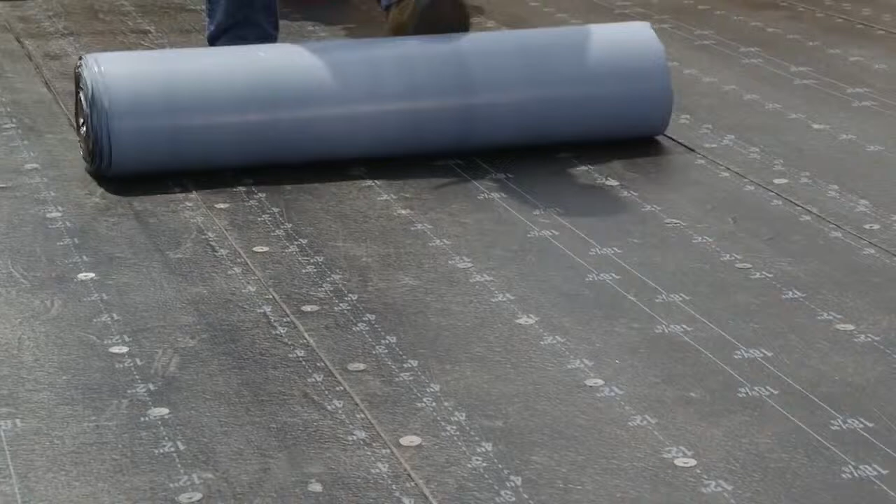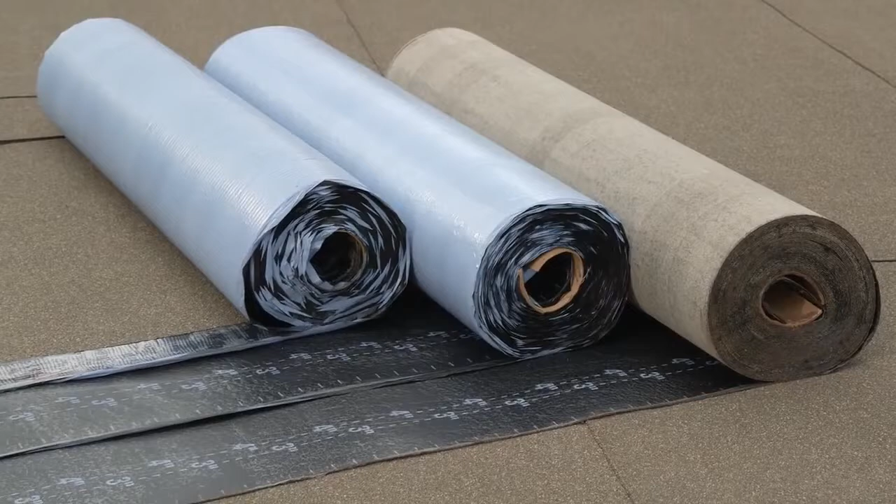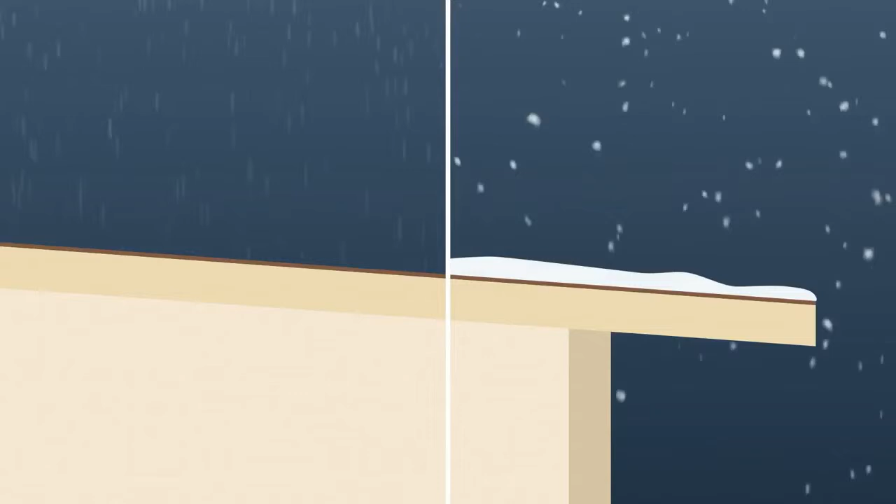The Owens Corning DeckSeal roofing system offers numerous advantages over competitive low-slope products, from its dual compound formula for durable performance to its granule-free side and end laps for seam sealing. It's no surprise that areas of the home below 2/12 pitch can require special attention. These low-slope roof areas, commonly found over garages, porches, additions, carports, and sunrooms, typically don't have the drainage of a steep slope. As a result, harsh weather conditions like snow, ice, and rain can result in leaks.

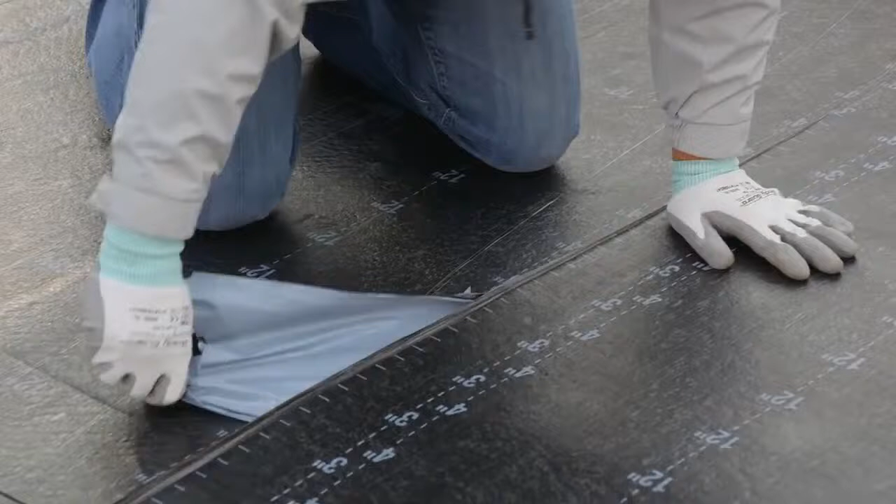The new DeckSeal roofing system can be applied as either a 2- or a 3-ply system to provide excellent protection and versatility to mix and match components. In this video, you'll learn common practices for low-slope residential applications, including why the Owens Corning DeckSeal roofing system is a preferred choice. The DeckSeal roofing system is a self-adhered mod bit technology, which is often preferred because it is an easy, clean application with no fumes, odors, or smoke.

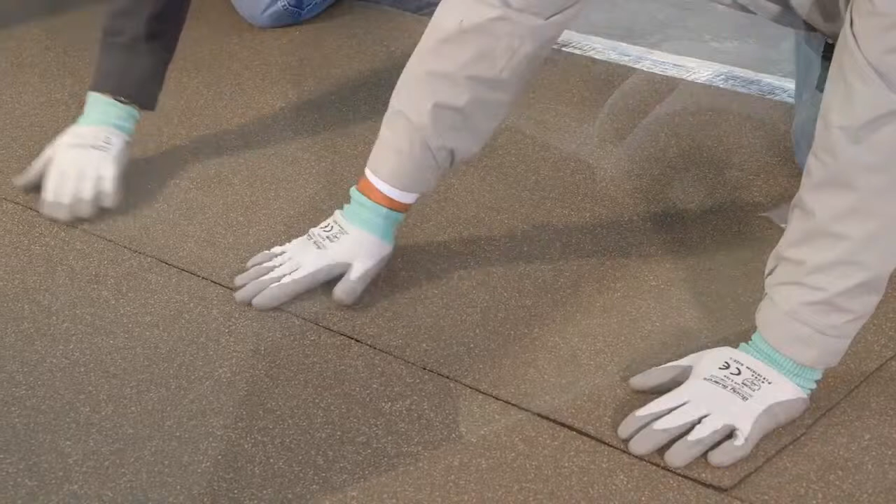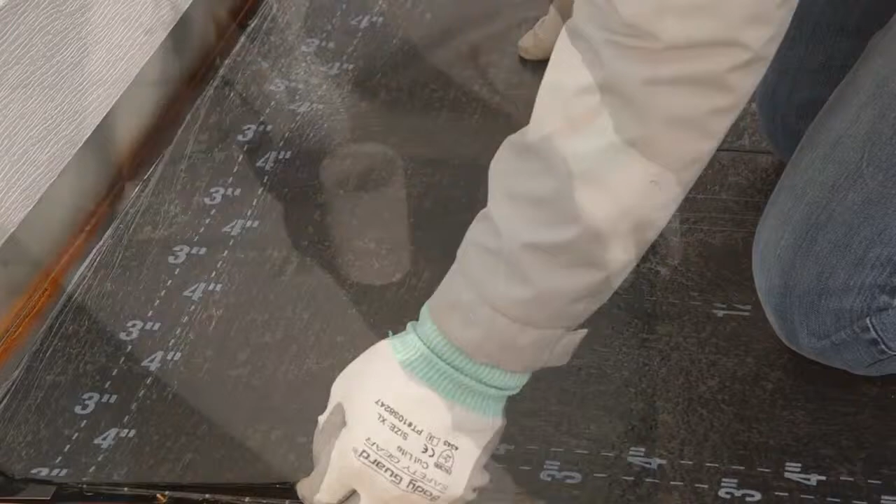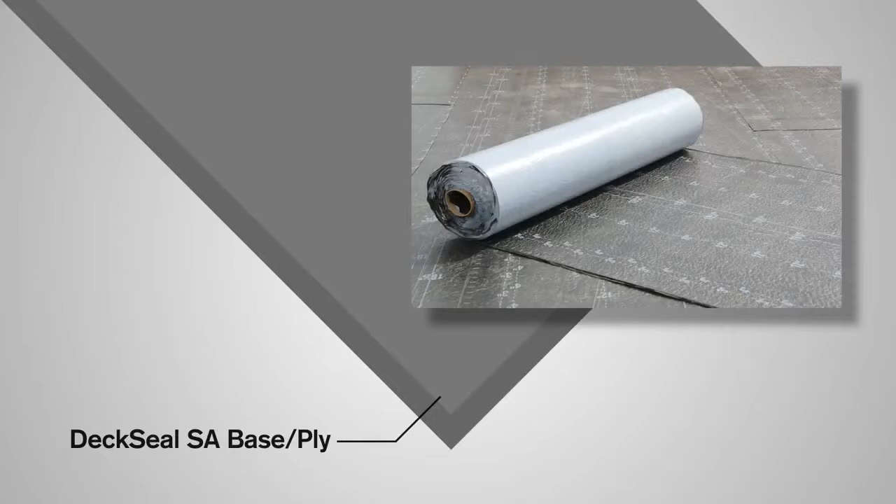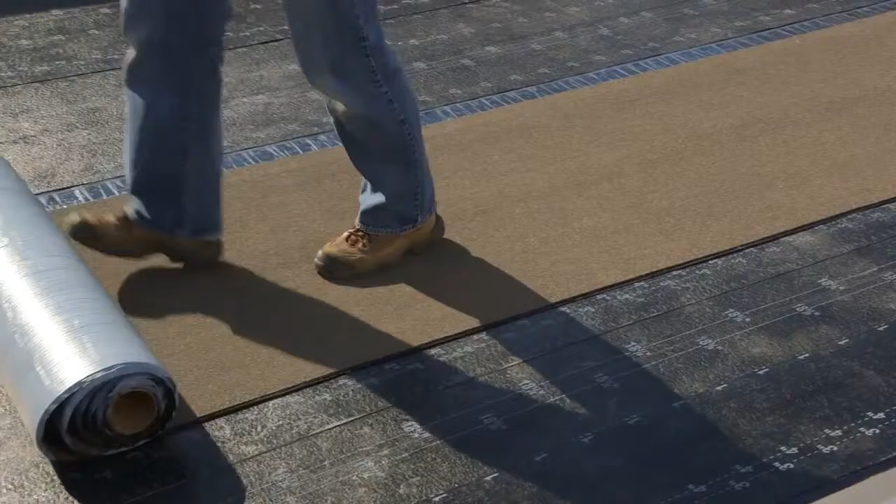The innovative DeckSeal roofing system consists of up to 3 layers that serve as waterproofing for the field of the roof, flashings, perimeter terminations, and typical rooftop penetrations. The first layer is the mechanically attached base sheet called the DeckSeal MA nail base. The second layer is the self-adhering base sheet called DeckSeal SA Base/Ply. And lastly, the cap sheet membrane on the top surface is known as the DeckSeal SA SBS cap. These 3 membranes can be used in different combinations to achieve a premium membrane assembly.

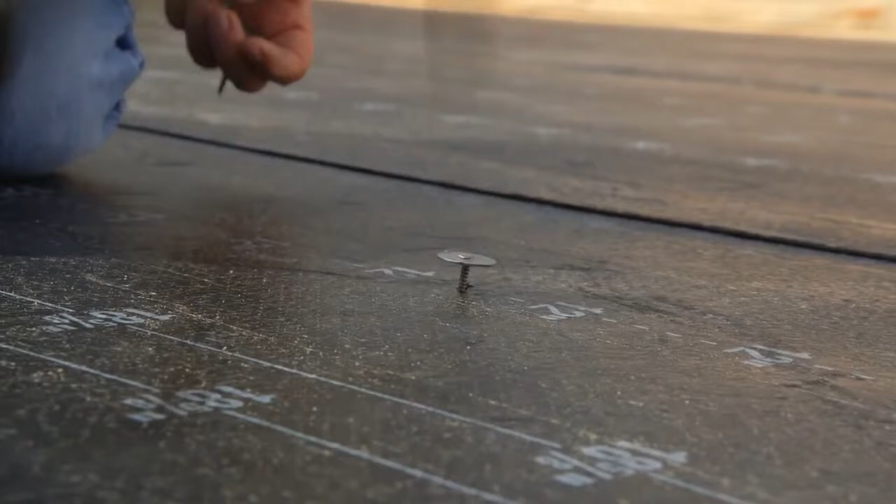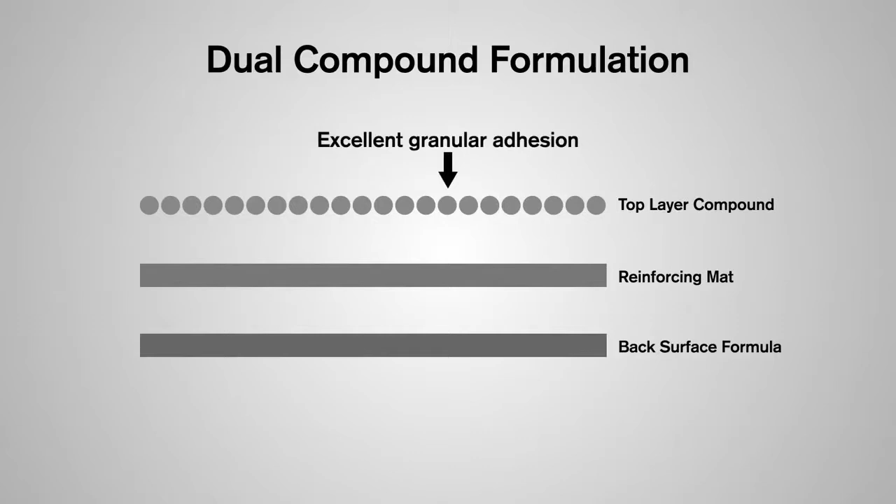Typically, a mechanically attached base sheet is used if a deck is unsuitable for a self-adhered base, or if the customer wants to easily strip the deck if a future replacement is necessary. The Owens Corning DeckSeal roofing system has several unique features. Its dual compound formulation provides excellent granule adhesion, while the back surface formula provides aggressive adhesion. Together, the 2 compounds offer enhanced adhesion, added durability, handling, and long-term performance that our customers expect.

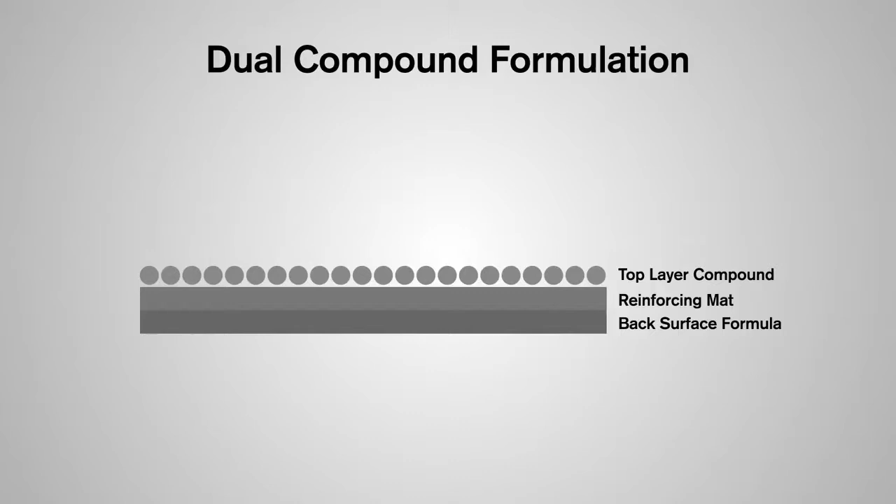Another feature of the DeckSeal roofing system is the granule-free adhesive selvedge on the side and end laps for quality seam sealing. Available in 6 popular colors, DeckSeal roofing system also streamlines your ability to color match and coordinate to the most popular shingle colors with today's homeowners. The DeckSeal roofing system is supported by the most recognized brand that homeowners know and trust. Taking a system sell approach with Owens Corning roofing products can help make closing the sale fast and easy.

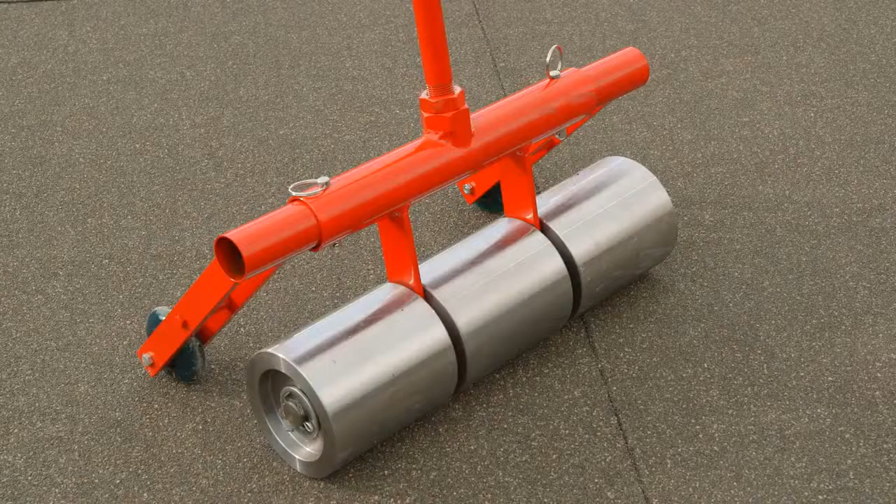With proper preparation and installation best practices in place, installing the DeckSeal roofing system is fast and dependable. Recommended tools for installation of the DeckSeal roofing system include a 3 to 4 inch wide hand roller, heavy-weighted linoleum or lawn roller for pressing the membrane in place, a paintbrush for application of primer, a trowel for applying adhesive, a caulk gun, a handheld hot air welding gun, a roofer's knife equipped with a hooked blade, and soft-soled shoes.

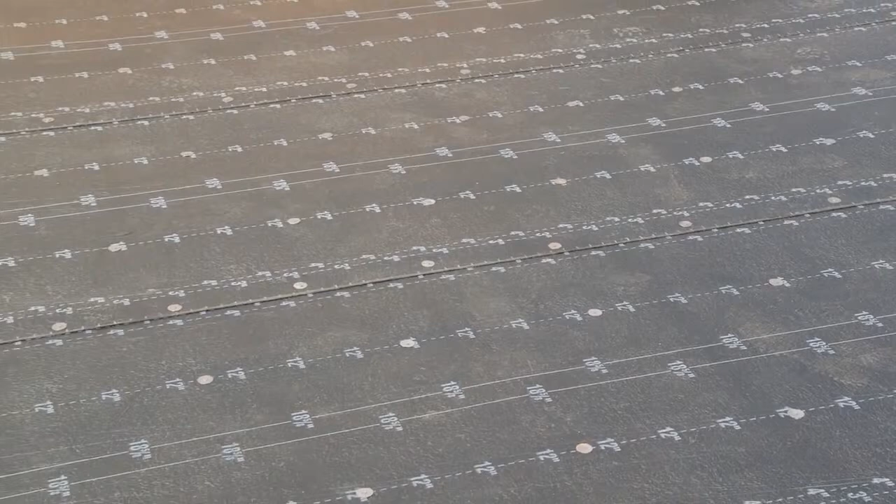While different combinations of base plies can be used with the cap, what we're showing today is a 3-ply system which includes the nail base, the self-adhered base, and the cap. Owens Corning DeckSeal base sheet should be used in conjunction with the DeckSeal SA SBS cap. Do not use DeckSeal base sheets in a torch-down application. Remember, when storing and handling the DeckSeal roofing system, store rolls upright on pallets in dry, well-ventilated indoor areas. Do not store rolls on their sides. Protect rolls from exposure to elements including the heat, sun, cold, and moisture.

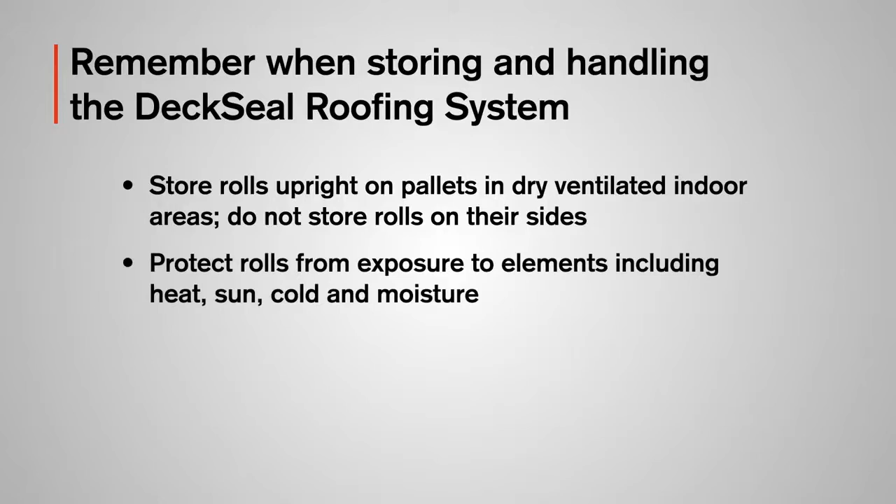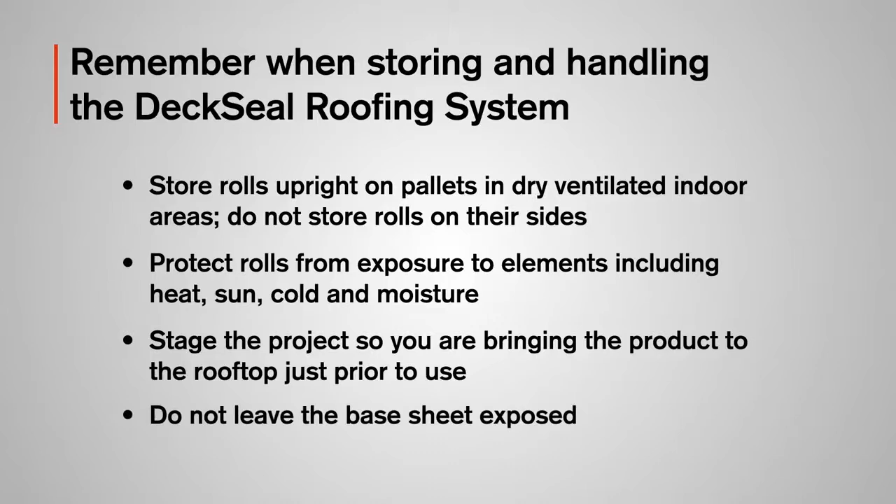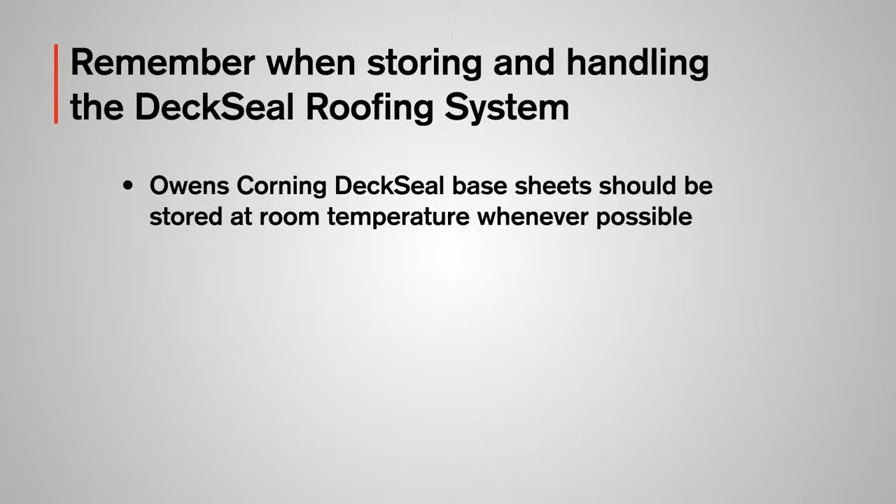Stage the project so that you are bringing the product to the rooftop just prior to use. Do not leave the base sheet exposed. Plan the work so you can apply the cap sheet to the exposed SA or MA base sheets the same day. Owens Corning DeckSeal base sheet should be stored at room temperature whenever possible. Do not store out of the box for prolonged periods or in temperatures above 90 degrees Fahrenheit.

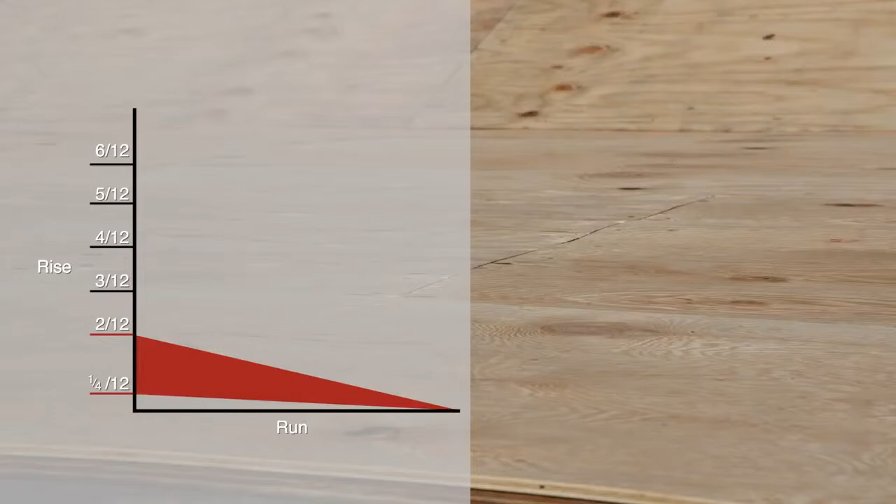Remember that safety should always be the primary consideration on any application. Owens Corning Roofing recommends following all OSHA safety regulations. DeckSeal MA nail base is designed to be installed on roof slopes between 1/4:12 and 2:12 and is to be applied directly to the exterior grade plywood or OSB. Plywood must be a minimum of 15/32 inches and OSB a minimum of 7/16 inches. Check local building codes for specifics.

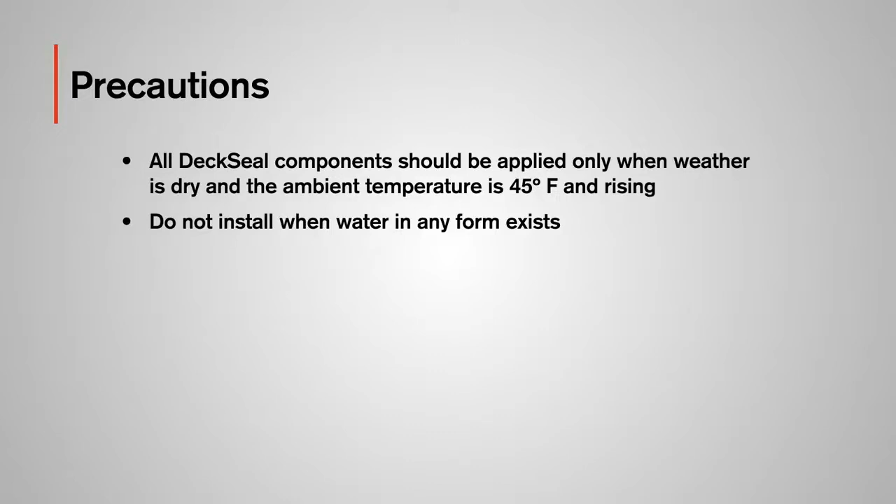All DeckSeal components should be applied only when the weather is dry and the ambient temperature is 45 degrees Fahrenheit and rising. Do not install when water in any form, such as rain, dew, ice, frost, or snow exists. All roof deck application areas must have positive drainage, continuous support, and be structurally sound to support the weight requirements of the roofing system. Ensure the installation of the DeckSeal base plies do not prevent or interfere with ventilation of the existing structure. Failure to follow manufacturer's application instructions may void the product warranty.

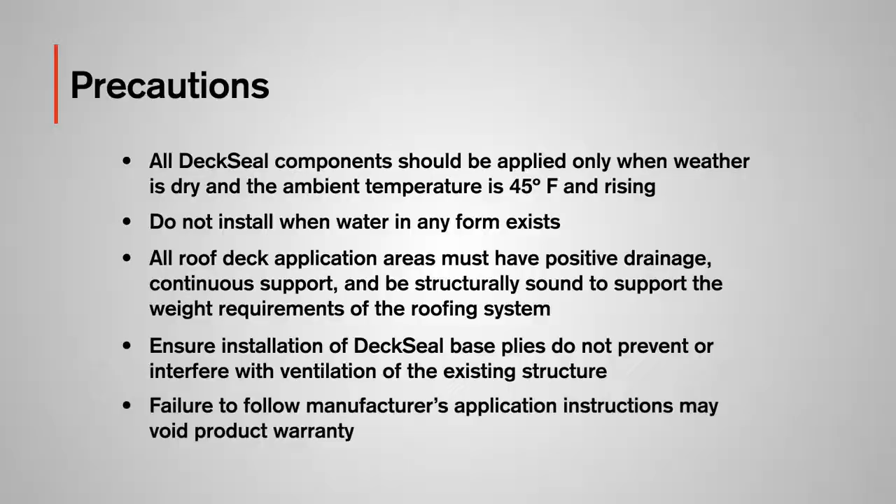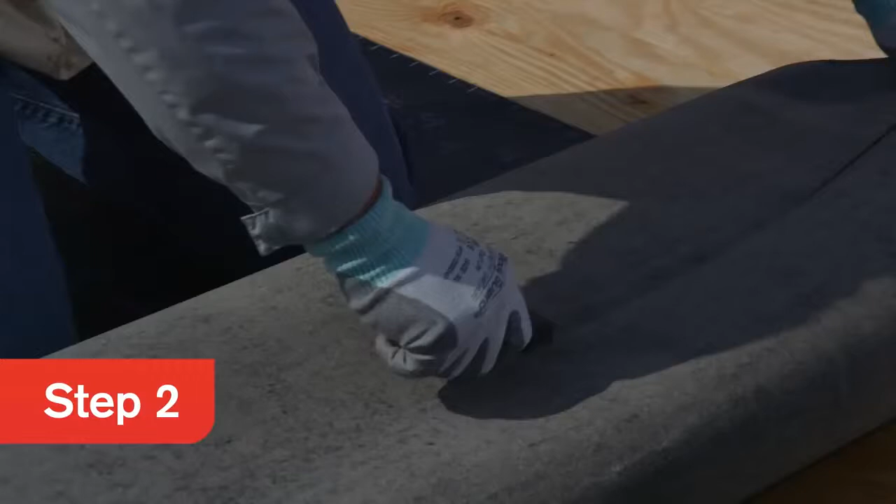When beginning installation, you must first sweep the roof surface to remove any dust, dirt, or debris. Second, cut the DeckSeal MA nail base to manageable lengths. Allow the cut sheets to relax prior to installation to help minimize wrinkles in the finished surface. When installing a 3-ply or 3-layer system, the base starter course will always be 1/3 of the roll width. Cutting on one of the 12-inch lay lines is approximately 1/3 of the roll. The side lap seams of any layer should always be offset from the other layers.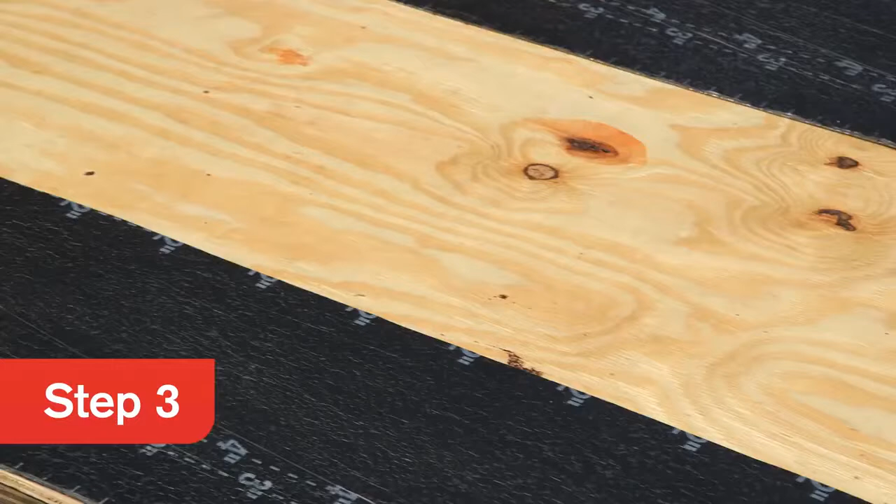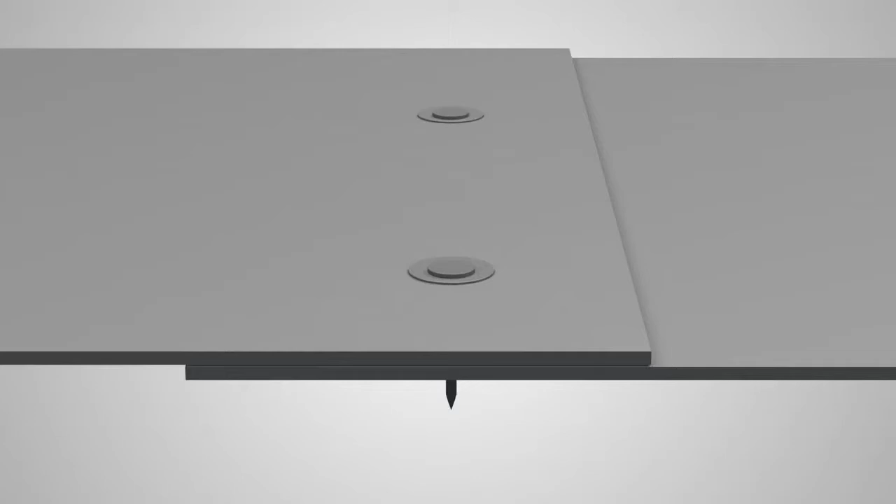Next, lay the material flat on the roof aligned with the eaves, or at the lowest point of the roof. Nail the starter course at 6 inches on center down the center of the sheet, using 1-inch diameter metal cap nails. Do not nail along the edges at this time, only in the center. If additional pieces are needed to complete the starter course, continue to install the 1/3 width piece for the 3-ply system at the lowest point, overlapping the preceding lap by 6 inches. Install nails centered in the 6-inch end lap at 6 inches on center.

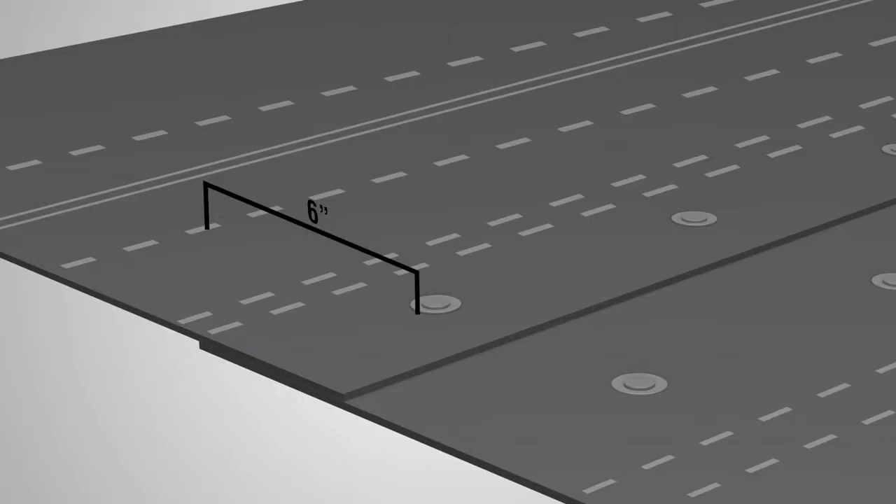After completion of the starter course installation, the next course will be lapped at a minimum 3 inches over the starter course, and nails will be installed in the side lap at 6 inches on center. All courses except the starter course will require an additional 2 rows of nails at 6 inches on center, evenly spaced vertically and staggered down the center of the sheet.

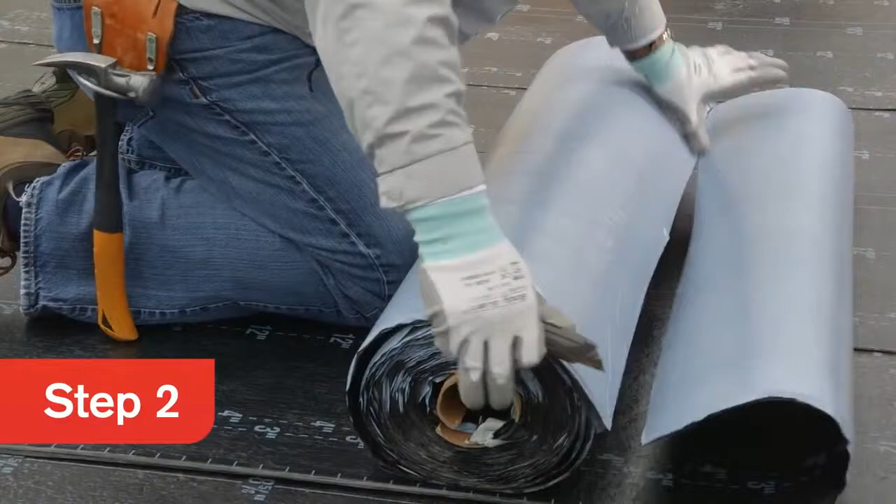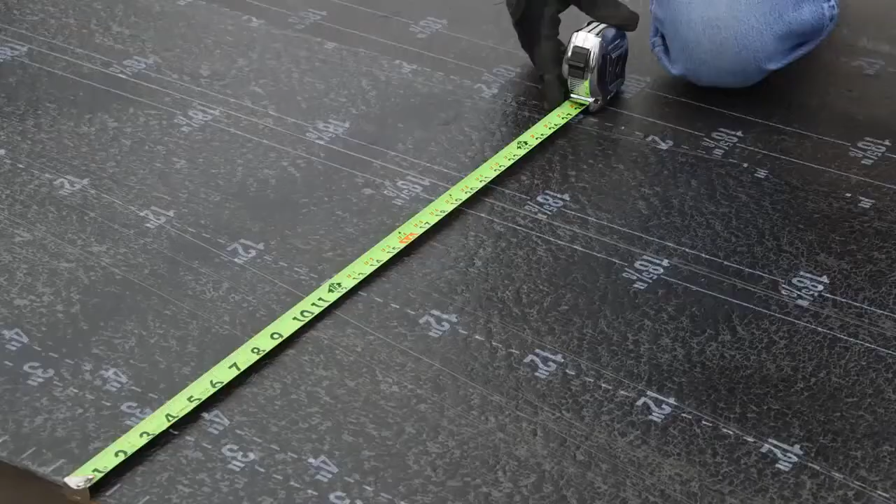Now let's apply the self-adhered base ply. First, sweep the roof surface to remove any dust, dirt, or debris. Second, cut the DeckSeal SA base ply to manageable lengths. Allow the cut sheets to relax prior to installation. Third, cut the starter course of DeckSeal SA base ply to an approximate 2/3 sheet width. Cutting on the 12-inch lay line will leave approximately 2/3 of the roll width. Next, lay the material flat on the roof aligned with the eaves edge, at the lowest point of the roof.

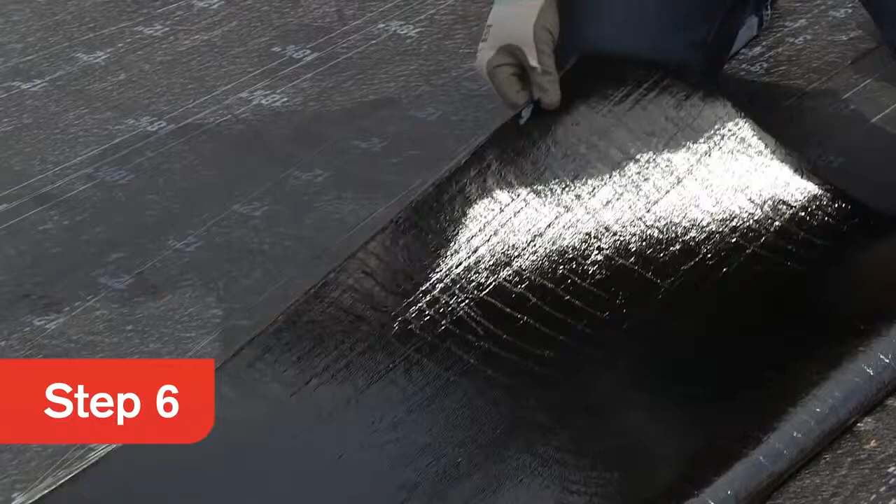Fold the aligned sheet back halfway, exposing the split release film. Peel the release film at a 45-degree angle in a constant motion, while firmly holding the half of the sheet that is in contact with the roof as the liner is removed. Use hand or foot pressure to bond that portion of the sheet to the deck. If the split release liner remains on the opposite half of the sheet, flip the opposite half back and remove the remaining release liner. The side lap seams of any layer should always be offset from the other layers.

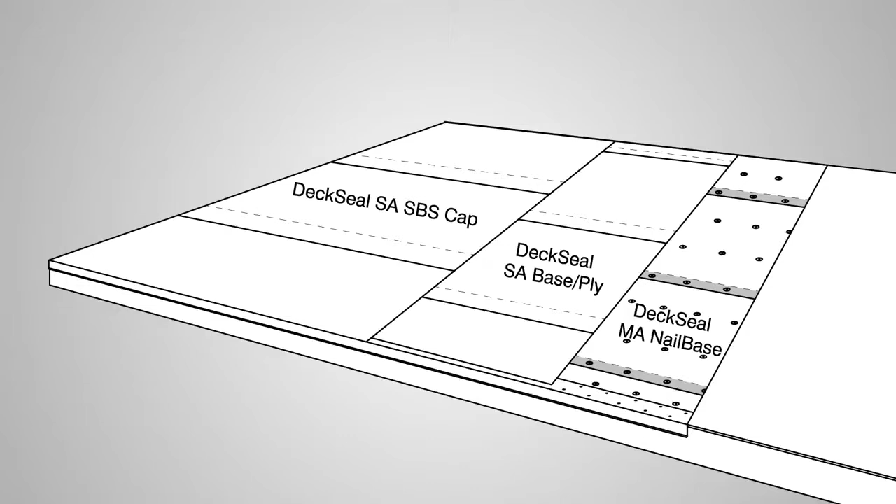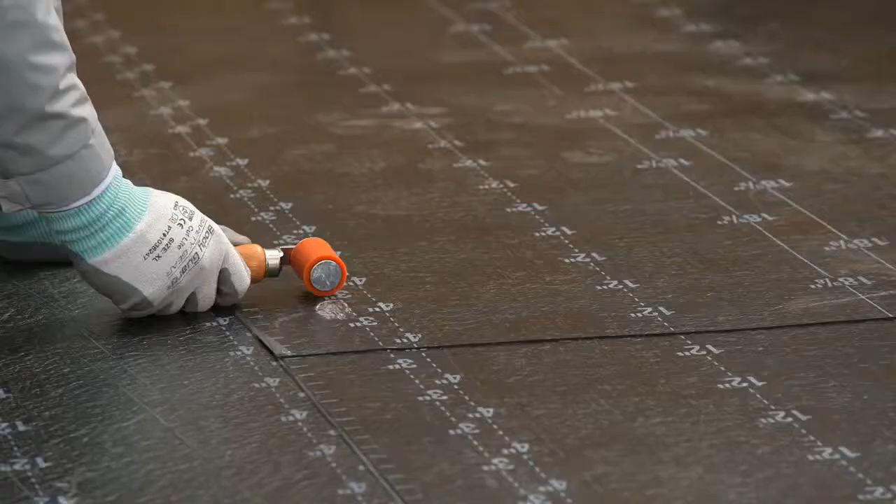Cut the top and bottom corners off the first starter course of the SA base ply, which will be overlapped, at a 45-degree angle. Next, align the succeeding sheet, overlapping the preceding end lap by 6 inches. Cut a 45-degree angle at the top corner of the succeeding starter course. Remove the release liner and adhere as done with the preceding sheet. Roll the end laps firmly with a hand roller. It is best practice to roll the entire course with an 80-pound linoleum roller to remove any trapped air.

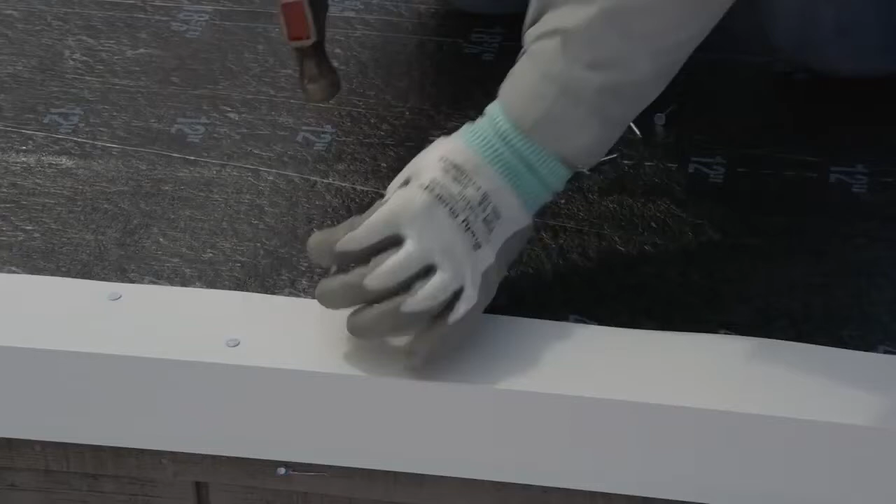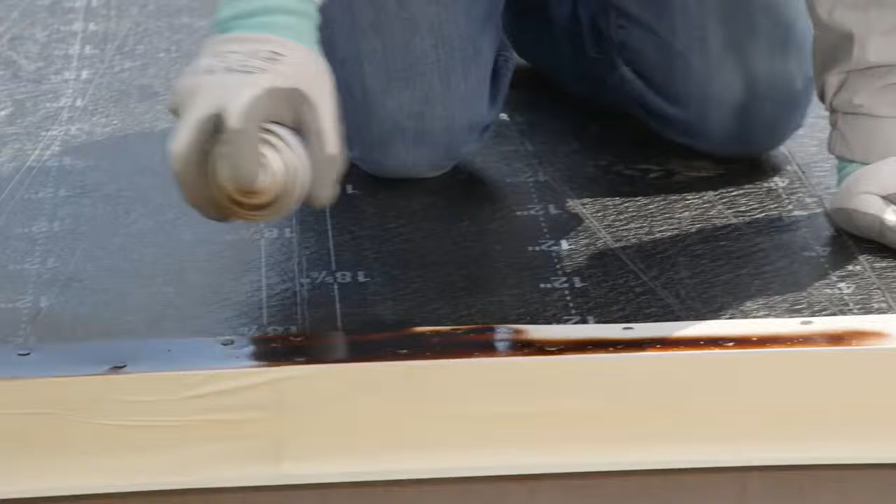Install the roof flange of the edge metal over the base sheet at the lowest point of the roof. Nail the edge metal 4 inches on center in a staggered pattern. The edge metal must be 24 gauge galvanized steel or 0.04-inch formed aluminum, with the top surface primed with either an asphaltic primer that meets ASTM D41 or a commercially available water-based acrylic primer. The roof flange of the edge metal should be 3 to 4 inches wide.

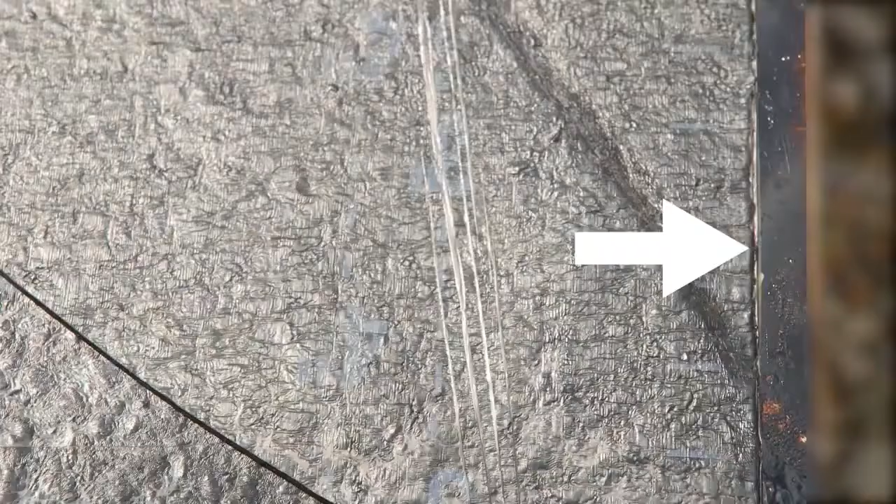Primed edge metal must be dry to the touch before membrane application. Install a minimum 8-inch wide strip of DeckSeal SA base ply over the edge metal, leaving 1/2 inch of the edge metal exposed at the eaves.

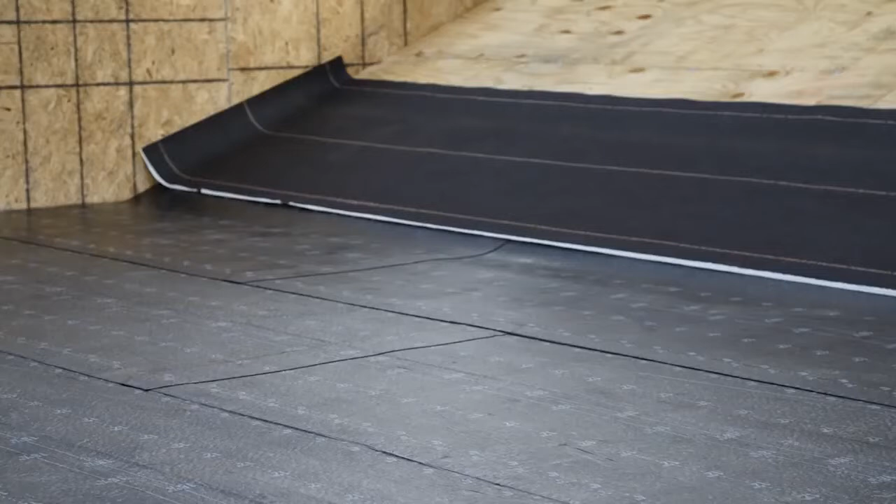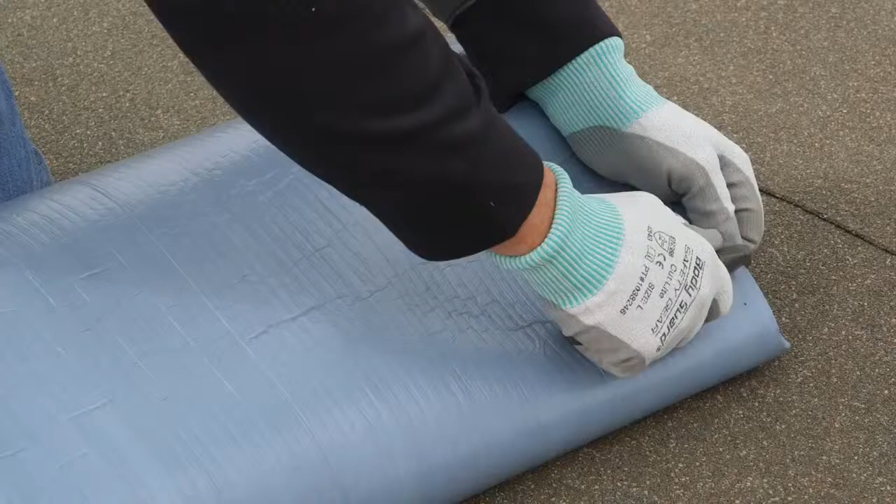As with every layer, sweep the roof surface to remove any dust, dirt, or debris, making sure the surface is clean and dry. DeckSeal SA SBS cap is to be applied directly to the DeckSeal MA nail base or DeckSeal SA base ply. First, cut the DeckSeal SA SBS cap to manageable lengths for the conditions. Allow the cut sheets to relax prior to installation.

The DeckSeal SA SBS cap has a release film covering the selvage edge. Next, lay the material flat on the roof aligned with the eaves edge at the lowest point of the roof. Fold the aligned sheet in half, exposing the split release film. Peel the release film at a 45-degree angle in a constant motion while firmly holding the half of the sheet that is in contact with the roof as the liner is removed.

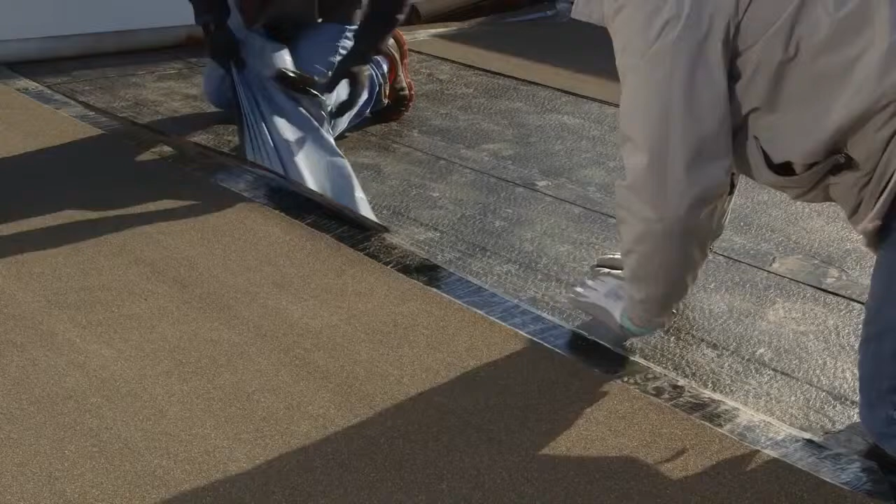Now roll the opposite half of the sheet back and remove the release liner using the same method as in the previous step. If additional pieces are needed to complete the starter course, the end lap to be overlapped must be cut at 45-degree angles on the top and bottom corners. The top corner of the piece that is overlapping the previous piece must also be cut on the top corner at a 45-degree angle. The overlap is to be 6 inches.

The end of each roll of DeckSeal SA SBS cap has a factory end lap selvage edge covered with a release film. Remove the end lap release film and press the overlapping sheet into place. Where there is no factory selvage edge for end laps, the following methods can be used. Hot air welding. The area between the granular surface and self-adhesive backing can be heated with a hot air welding tool and rolled with a hand roller. This will ensure a watertight seal to the end laps.

Modified roofing cement. In lieu of hot air welding, the top layer can be set in a thin layer of modified asphalt flashing cement that is at least 6 inches wide and approximately 1/8 inch thick. Take care to prevent roof cement from oozing onto exposed areas. If this should occur, sprinkle loose granules on the exposed asphalt immediately. End laps must be overlapped a minimum of 6 inches and be fully adhered.

Press each sheet into place with firm, even pressure. Roll edges and all lap seams firmly with a hand roller to ensure full adhesion. After each course is completed, roll the course with an 80-pound roller. Start at the center and work outward to remove trapped air. Care must be taken to prevent injury when rolling, especially on sloped surfaces.

For the succeeding course, position the next sheet by completely overlapping the selvage edge of the previous sheet. Remove the side lap selvage edge release film on the area to be overlapped. Remove the release liner and adhere as with the previous sheet. Do not remove the remaining release film covering the side lap selvage edge at this time.